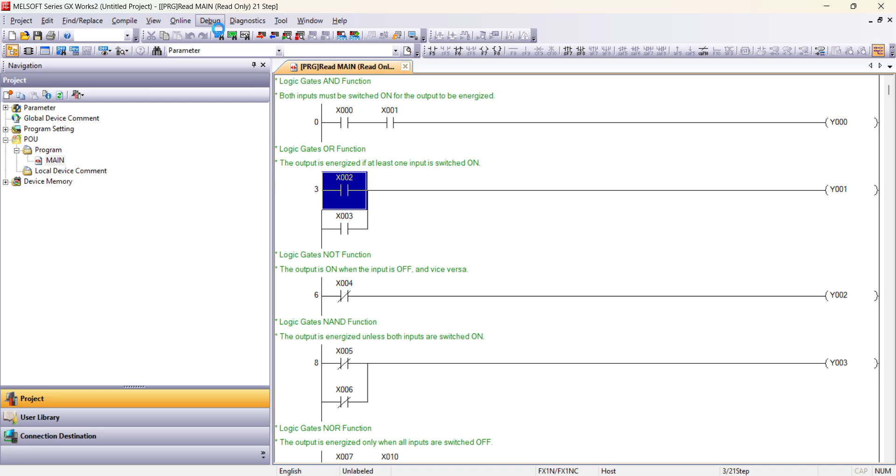Next is logic gates OR function. The output is energized if at least one input is switched on. So, if I turn this on, I need to simulate first. If I turn this on, it will light up. Then this one, it will light up.

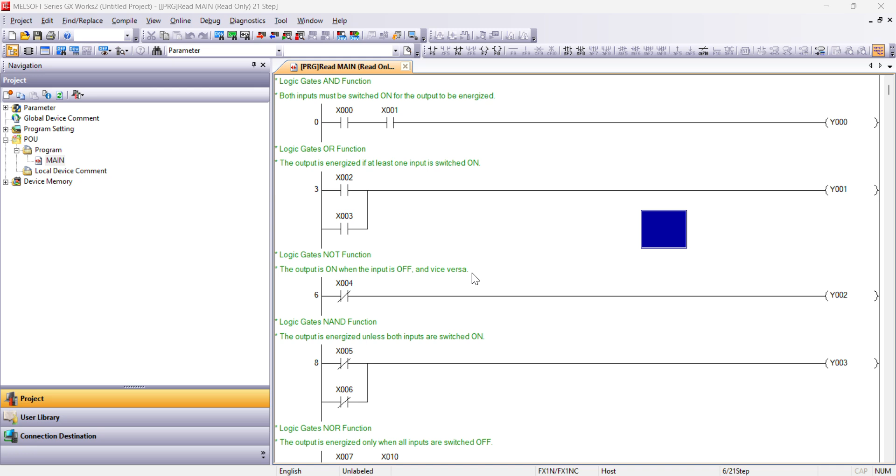Next, logic gates, NOT function. The output is on when the input is off and vice versa. So, let's see kung totoo nga ba na ganon.

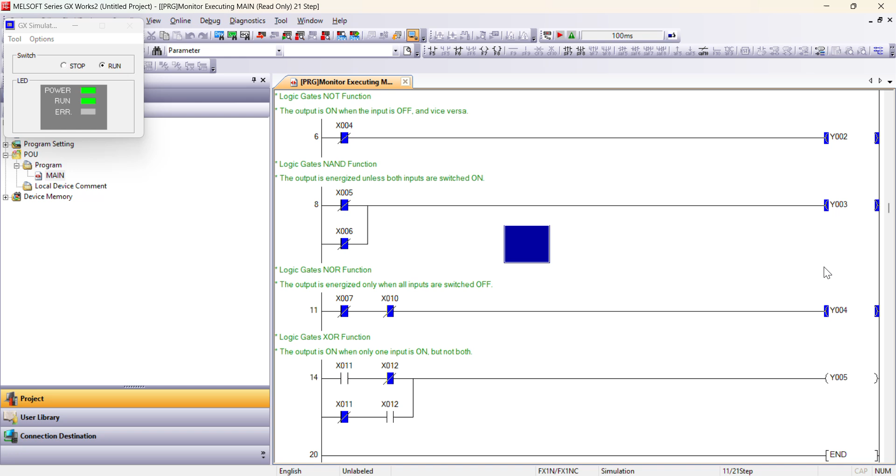So, for the fifth one, logic gates, NOR function. The output is energized only when all inputs are switched off. Let's see. As you can see, naka-off po ang ating inputs. That's why on itong ating output. If I turn this on,

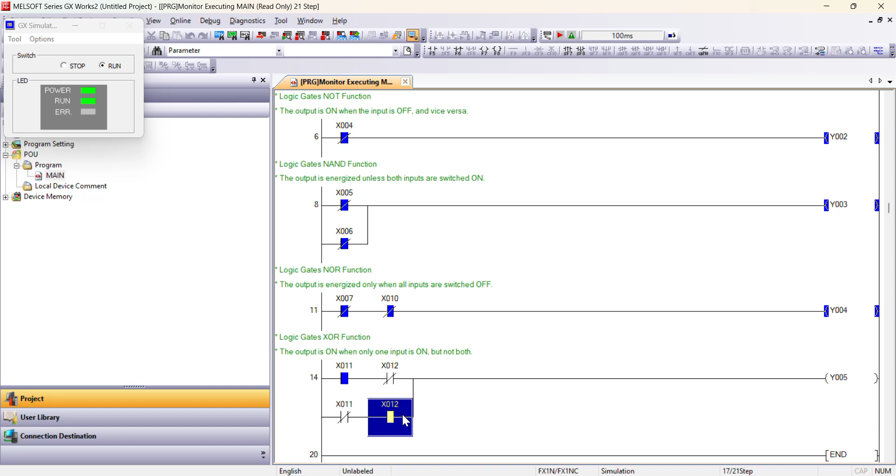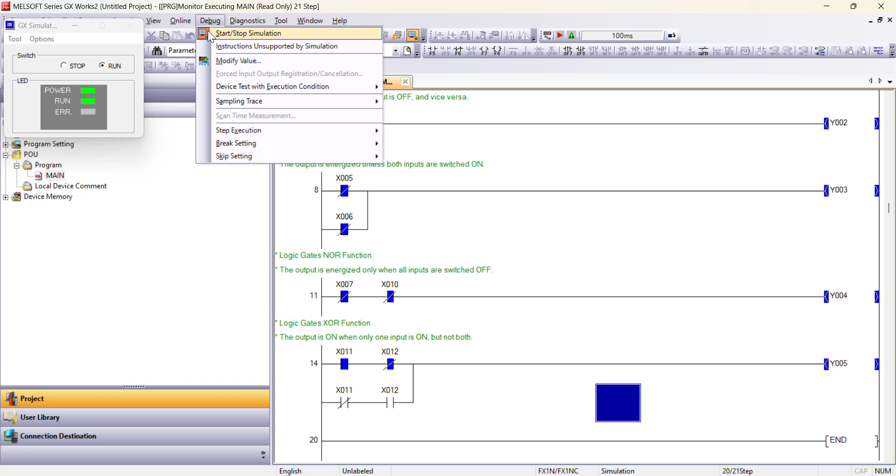And that's all my program. That's how the different logic gates work sa PLC program. Each gate has its own condition para umiilaw ang output depending sa inputs na naka-on or off.